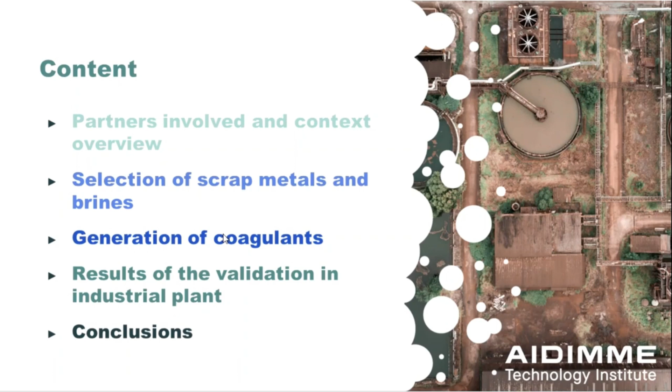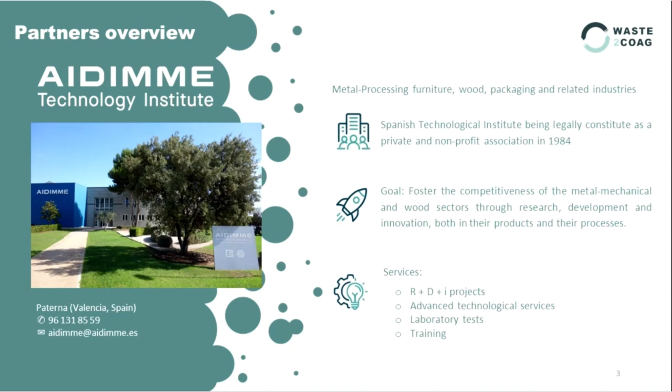As a brief introduction to AIDIMME, we are a research center focused on metal and wood processing, as well as packaging and related industries. Our mission is to improve the metal, mechanical, and wood sectors in their products and processes. Our services include research and innovation projects, technological services, and laboratory analysis, as well as education through different masters and specialized courses.

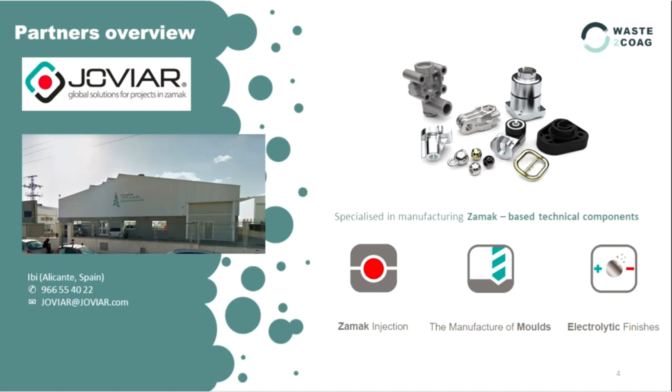Our industrial partner in this phase is JOVIAR, a company based in Alicante, whose main activity is the manufacturing of technical pieces through Zamak injection. They also produce molds and carry out electrolytic finishes. And JOVIAR has more than 60 years of experience in this field, which makes it an excellent partner to validate this technology.

As the overview of the context, we have three problems to solve. On the one hand, we have the brines. We have a high generation of brines worldwide, coming mostly from desalination plants due to the scarcity of water. These brines are normally discharged without treatment, which has a negative environmental impact as they increase the salinity of the ecosystems.

Then, for the metals, there is a global scarcity of raw materials, which combined with the political instability results in an increase in the price of these metals. So it would be very interesting to recover as much as we can, including these scrap metals.

And finally, the coagulants. There is a high consumption of coagulants worldwide, used both in urban and industrial wastewater treatment plants. They are normally outsourced and are subject to constant price increases, and both the prices and the demand are expected to increase because of the stringent requirements in the effluent concentrations.

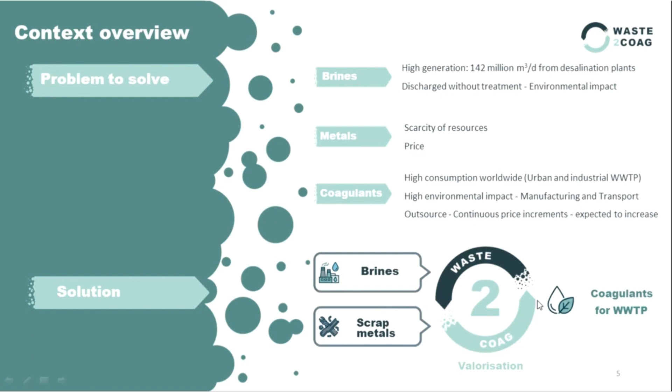So our proposed solution is to valorize these two wastes and transform them into resources as new reagents for the water treatment plants. We do this in the project through electrolysis, which is the way to valorize these two wastes into coagulants. Let's look at the details of our process.

Okay, as we mentioned, scrap metals and brines are the main inputs of the plant, but we cannot accept any type of waste. As in any other project or process, we need to carefully assess the quality of the metals and brines that go inside the system. First, for the selection of metals, we have to evaluate the quality, meaning their composition, to avoid water contamination, the inhibition of the biological treatment, and of course to ensure the good quality of the coagulants produced.

We also have to make sure that the shape, the thickness, and the dimensions are compatible with our specific pilot, and of course the price and the availability of those metals. Even though they are scrap metals, they are not free and they still have a cost.

On the other hand, we have to identify the most suitable source of brines for our ELS system. The brines can come, for example, from desalination plants or purification systems, in particular from sectors that use high quality water in their processes. The characterization of brines is essential to make sure that they have no pollutants, such as heavy metals, that compromise the quality of the coagulants.

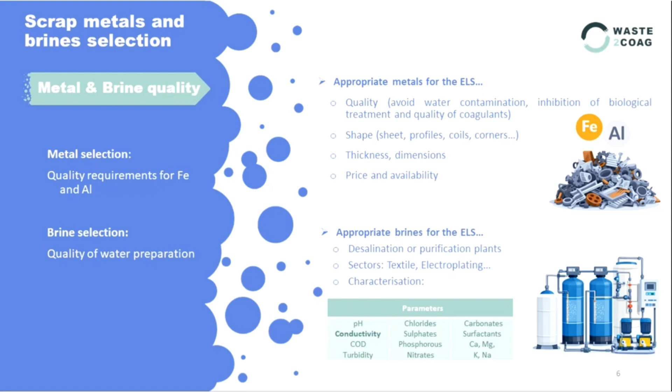We also checked, for example, the conductivity, which is a key parameter, as the power consumption is directly related to this parameter. The higher the conductivity, the lower the energy consumption of the process. Okay, JOVIAR requires pure water for their high quality processes, so they need to treat their water using demineralization equipment like the one in this scheme, which is the one in the picture.

The characterization of the brines is essential, as you know, and this equipment generates several waste streams during its cleaning cycles. That means that we cannot use them directly, but we have to prepare the optimum mixture. What we did is to choose and mix the different streams from the anionic and the cationic column to create an adequate mix for the input of the pilot system. In the end, we were able to use up to 70% of the streams generated, which also represented a direct saving for the company in waste management costs. The values of the parameters that were measured were within the optimum range defined for the system.

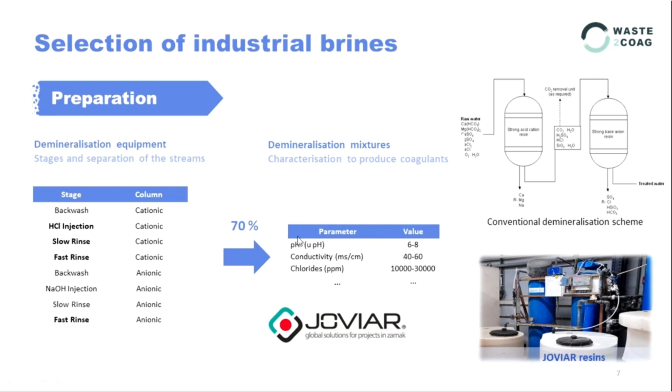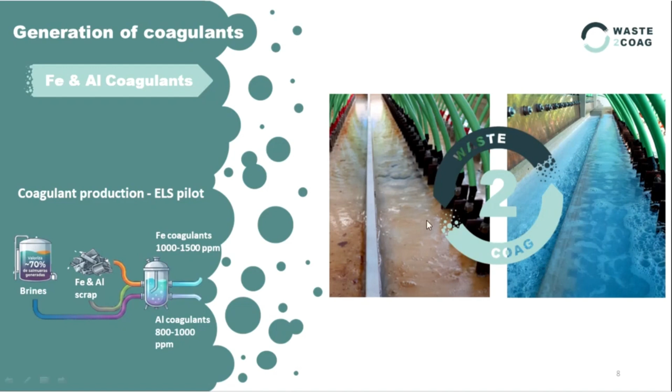So the next step after getting these brines is the generation of coagulants. As you can see in the picture, we introduced the brines from the company in the ELS pilot, the mixtures that we prepared from the demineralization equipment. So we produced both iron and aluminum coagulants. The concentration achieved for iron was around 1,000 and 1,500 ppm, and for aluminum 800 and 1,000 ppm. As you can see in the picture, they have a very characteristic appearance depending on the metal used. This one is iron and this one is aluminum.

So with the coagulants produced, we move on to the most important step of this phase, which is testing them in JOVIAR water treatment plant. That means replacing their conventional coagulants. First, what we did is to define the optimum dosage of the coagulant using jar tests, and then introduce these coagulants into the mixing tank of their plant. As you may know, the surface treatment sector treats waters with a high content in heavy metals, so our goal was to demonstrate that we could effectively remove them from the effluent water, that is, this part of the treatment plant.

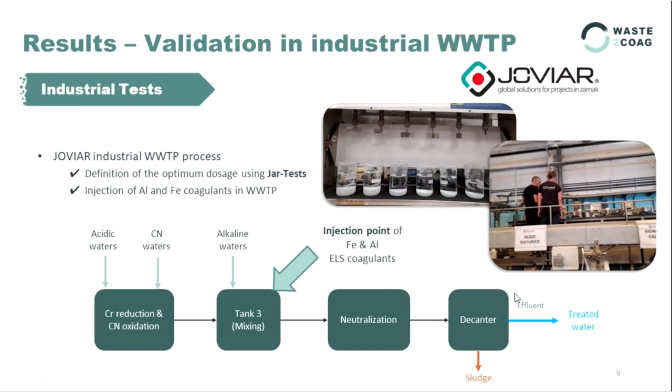The results were very good, as we achieved a removal efficiency above 90% for all metals. That means zinc, copper, chromium, and nickel. Besides, the treated water met the EPSAR discharge limits, which means that this water was efficiently treated and can be safely released to the sewer. This validation shows that our coagulants perform at least as well as conventional alternatives in a real industrial setting.

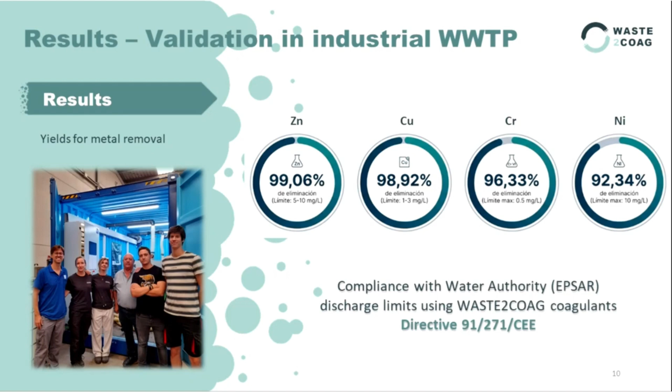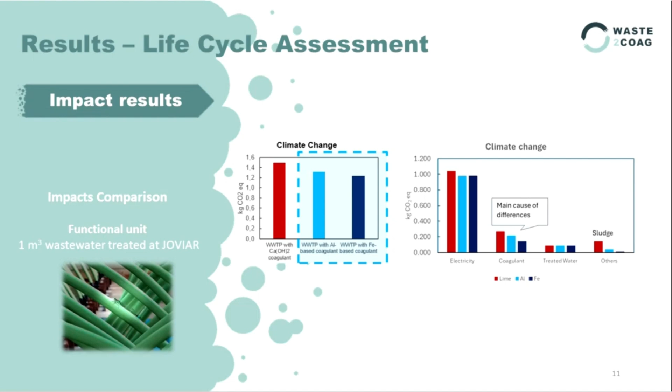So finally, to sum up, we performed the characterization of JOVIAR industrial brines and obtained suitable mixtures for the ELS treatment, allowing the valorization of 70% of the brines on site. We also demonstrated that the coagulants produced are safe and effective for the removal of heavy metals, so the water can be discharged in compliance with the EPSAR regulations. The life cycle assessment confirmed that our approach has a lower environmental impact compared to the conventional coagulants, and overall, this phase of the project has proven that our technology offers an efficient, scalable, and robust valorization of metal scraps and industrial brines, turning waste into resources.